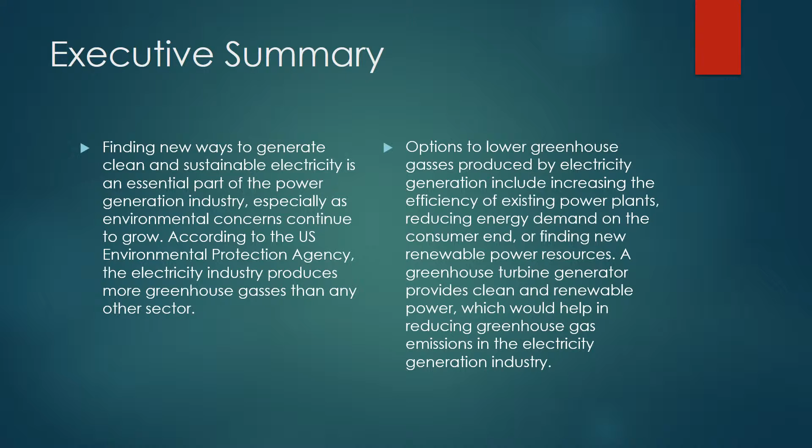A greenhouse turbine generator provides clean and renewable power, which would help in reducing greenhouse gas emissions in the electricity generation industry. A greenhouse turbine generator uses the sun's energy to heat air within a collector, which will force that air to rise up a tower and spin a turbine to produce electricity. There have been several prototype test generators built that have proven the concept, but the efficiency and cost of these generators has been a hurdle for using in industry.

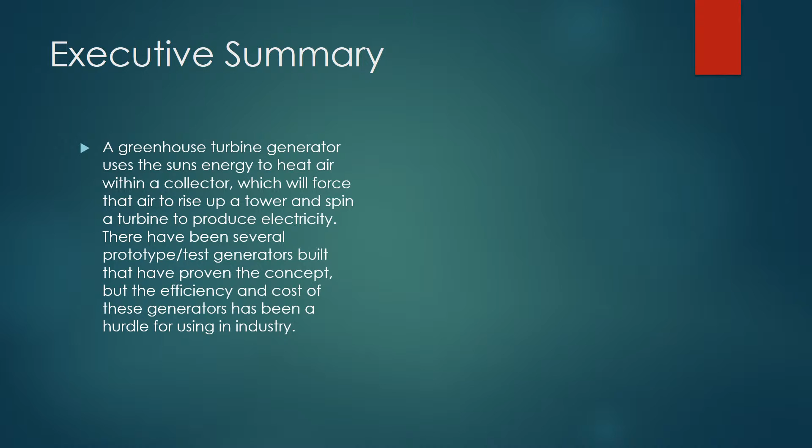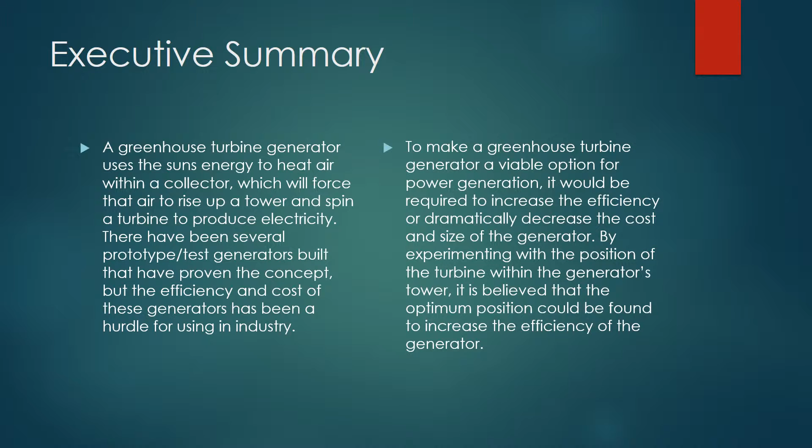To make a greenhouse turbine generator a viable option for power generation, it would be required to increase the efficiency or dramatically decrease the cost and size of the generator. By experimenting with the position of the turbine within the generator's tower, it is believed that the optimum position could be found to increase the efficiency of the generator.

Team GTG proposes to build a small-scale greenhouse turbine generator using available materials such as PVC, polyethylene sheeting, and a DC motor as the turbine generator. The turbine will be repositioned and tested along different points within the tower. Power output will be calculated at each of these points to determine the most efficient and beneficial location for the turbine within the tower.

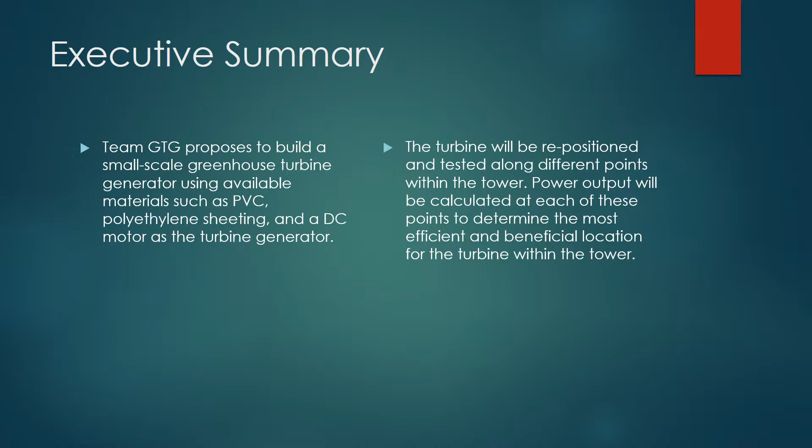The greenhouse turbine generator will be built on a budget of approximately $100 and will be implemented in two phases. The first phase will be building the greenhouse turbine generator in a time frame of approximately 4 to 6 weeks. The second phase is the testing phase, which will take approximately 2 to 4 weeks depending on weather conditions.

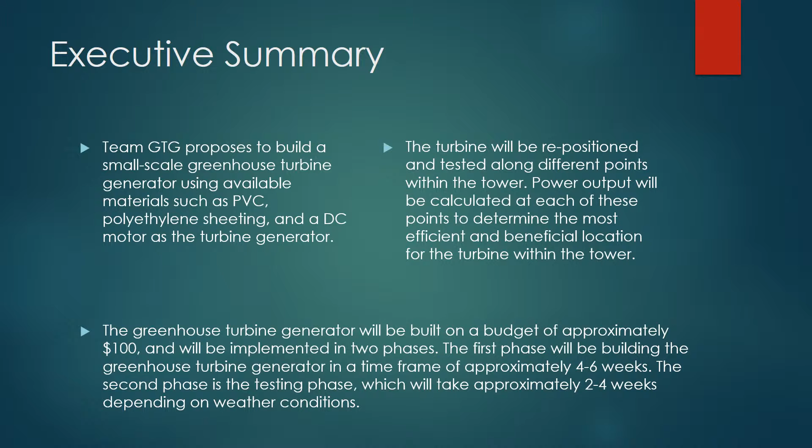Determining the optimum location of the turbine within the tower will provide a design spec that will increase the efficiency of a greenhouse turbine generator. By increasing the efficiency of the generator, it will bring this technology one step closer to becoming a viable option on a mass scale.

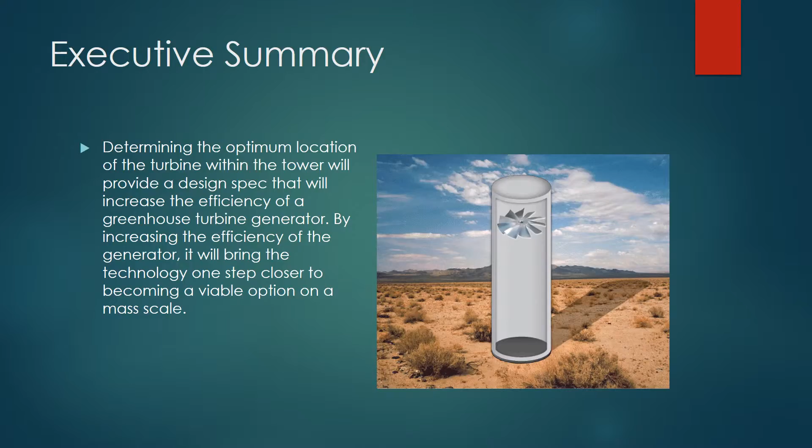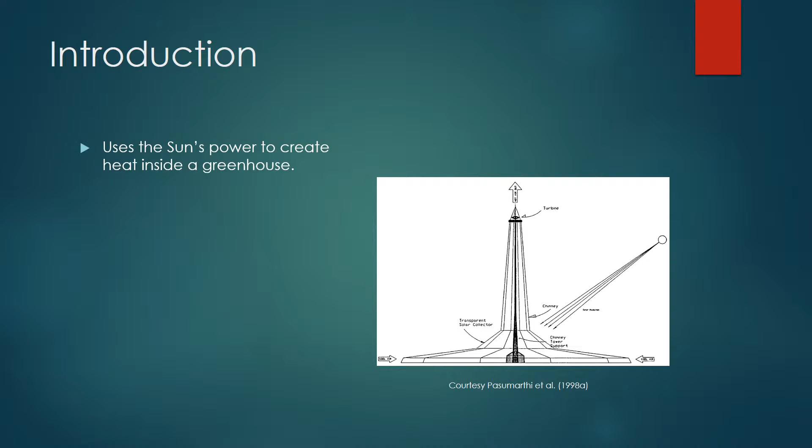A greenhouse turbine generator uses the power of the sun to heat the inside of the greenhouse. This greenhouse is known as the collector area. The air inside the collector is then heated up and it naturally rises to the top of a tower in the center of the collector due to the buoyancy effect. A turbine placed inside the tower will then be used to power a generator.

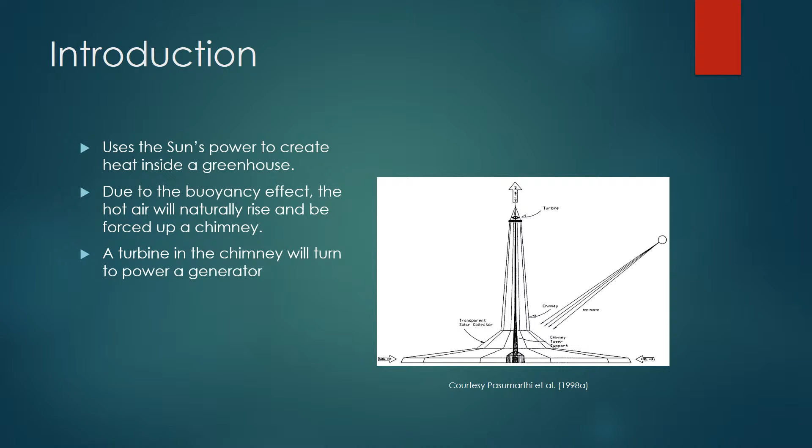The problem that our group and previous attempts have faced is how to increase the efficiency in order to make it cost effective to build. As it stands, previous designs only had efficiency in the 1 to 2% range. At that level, it requires a very large structure in order to create enough electricity to be viable.

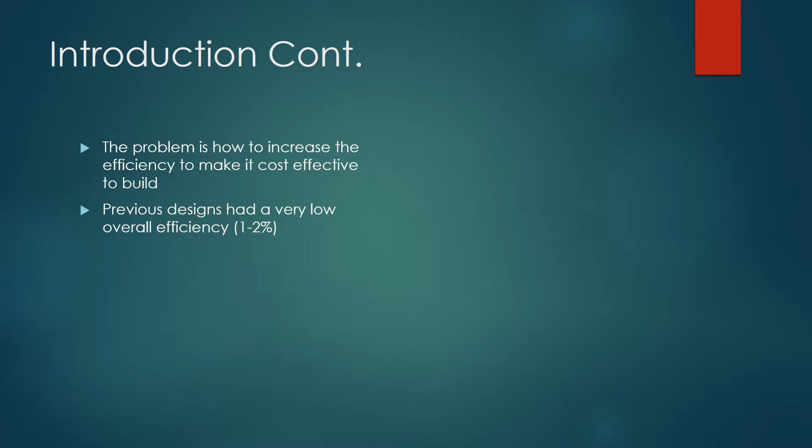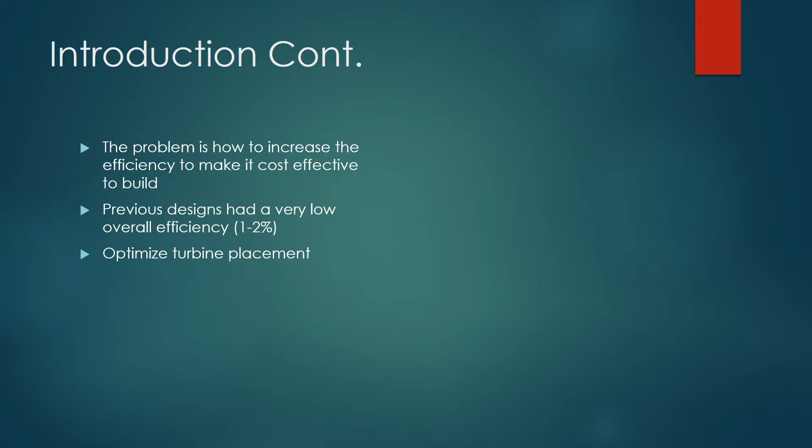We'll work on trying to optimize the placement of the turbine in order to see the maximum air velocity to create the maximum amount of electricity. We'll also try to increase the temperature inside of the collector, as the change in temperature from the outside area is what also will increase the air velocity into the tower.

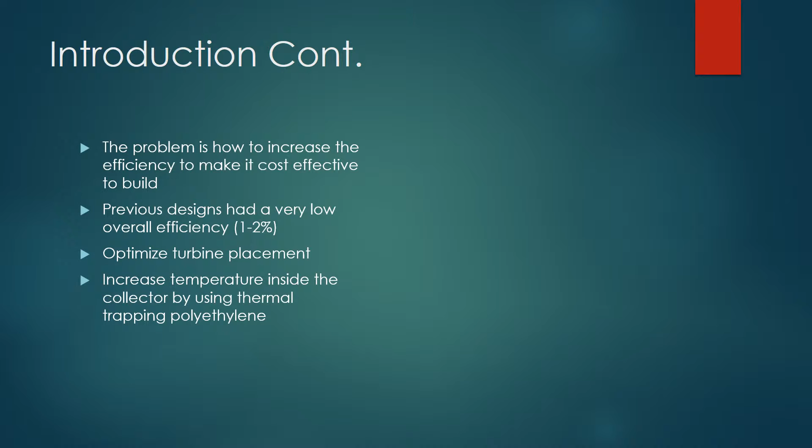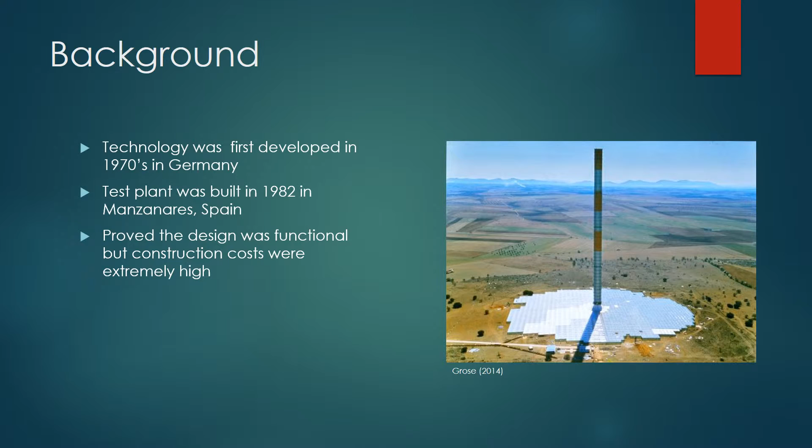The overall design for a greenhouse turbine generator itself isn't necessarily new. It's been around since the 70s, and then in the 80s they built a test plant in Spain. The problem they faced was the overall efficiency didn't make it cost effective. As you can see in the picture here, that tower is several hundred meters tall and very expensive to build. So without an increase in overall efficiency, to allow for either a smaller tower or for higher production, most attempts have been abandoned in creating a facility like this.

We think that by using modern materials, an efficient design, including a different placement of the turbine in the tower itself, and improved materials in the collector, that we can improve the overall efficiency of the system enough to make it a viable design for electricity production.

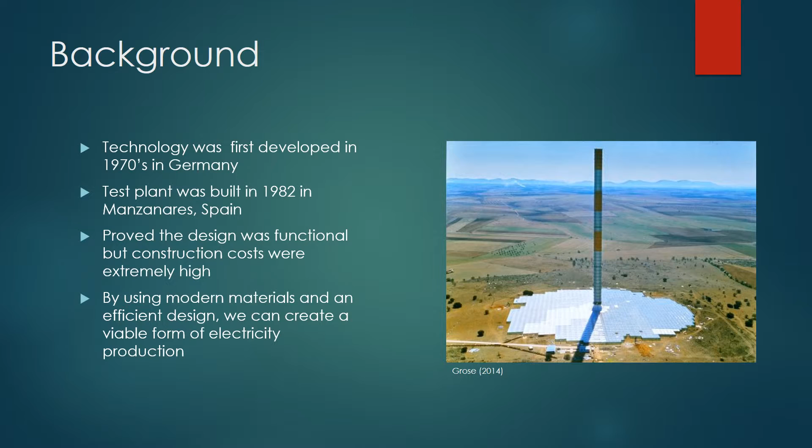Project scope. The overall goal of this project is to design and construct a greenhouse turbine generator. Once constructed, we will then test the position of the turbine within the tower that will achieve the best efficiency. By placing the turbine at different heights within the tower, we can see how different air velocities can maximize our efficiency. Through calculations, we have found that the efficiency increases with the height of the tower.

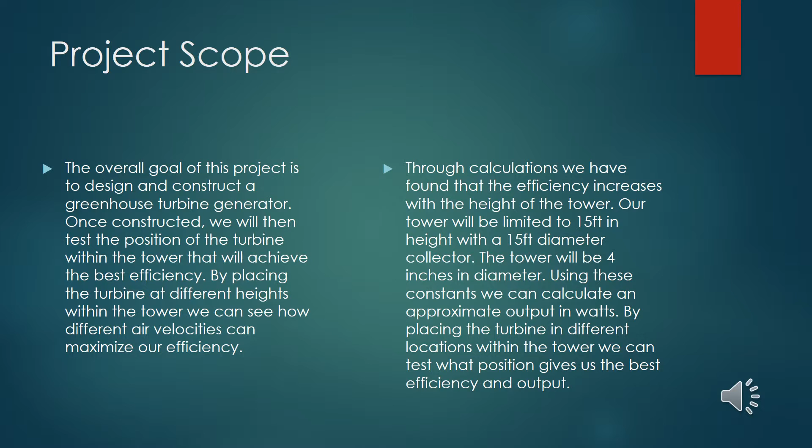Our tower will be limited to 15 feet in height with a 15-foot diameter collector. The tower will be 4 inches in diameter. Using these constants, we can calculate an approximate output in watts. By placing the turbine in different locations within the tower, we can test what position gives us the best efficiency and output.

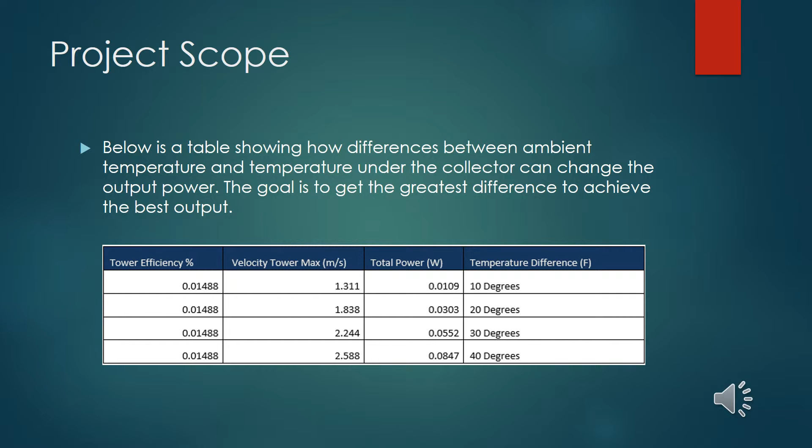The scope of this project includes developing the design and construction plans, acquiring all materials for the construction of the greenhouse turbine generator, installation of turbine inside the tower, installation of the greenhouse collector where heat will be collected and stored, the design and development of the turbine powered generator, construction of the greenhouse approximately 15 feet in diameter, the construction of the tower approximately 15 feet in height and 4 inches in diameter.

The greenhouse turbine generator will consist of 3 parts: the base, the tower, and the turbine generator. We will construct the greenhouse turbine generator and determine the best turbine position for maximum efficiency. The electricity created will be DC power. The scope of this project does not include the commercial sale of any power. This is strictly for research and testing. The building of turbine blades, we will be using pre-manufactured blades. The building of a motor generator, and the use of a power supply to convert from DC to AC voltage.

Our group's design addresses several of the EC 2000 Criterion 4 considerations. First one addresses the environmental. This is a clean alternative for large-scale electricity production. It doesn't have as great of impact on the environment in the long term. There's impact in the initial construction, but then the facility essentially operates on air and the heat generated by the sun.

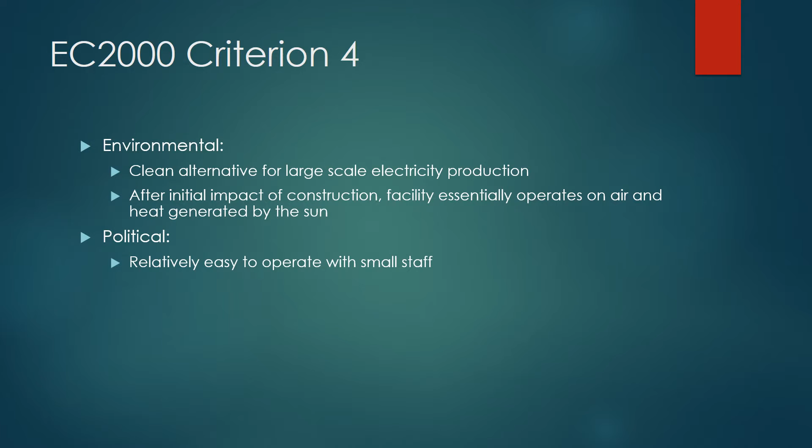Another consideration addressed is political. This facility would be relatively easy to operate with a small staff. This would be beneficial in developing countries that don't have the luxury of a large trained workforce available. So then it could improve the infrastructure by providing electricity to areas that may not have that currently.

Another consideration is the safety. This facility wouldn't use any combustible fossil fuels, so there's less risk of explosion and exposure to toxic fumes. Additionally, there are very few moving parts in this system other than the turbine attached to the generator. There isn't as much danger in the operation of this facility.

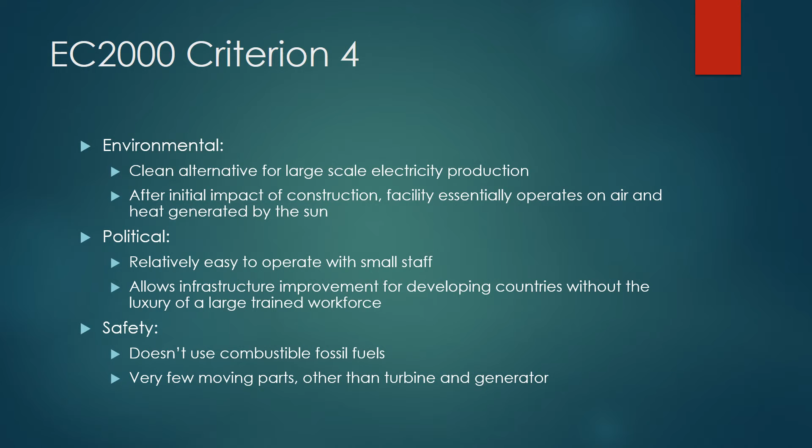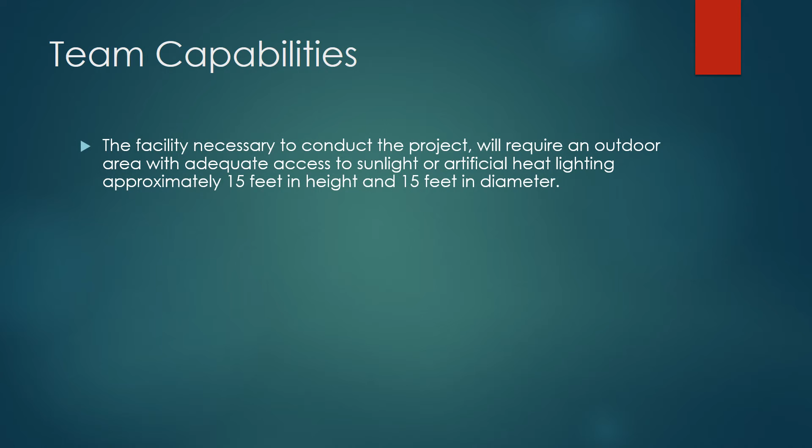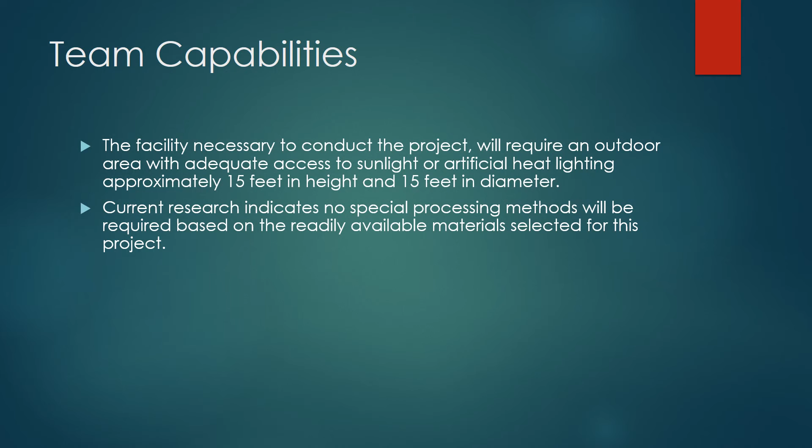Team capabilities. The facility necessary to conduct the project will require an outdoor area with adequate access to sunlight or artificial heat lighting, approximately 15 feet in height and 15 feet in diameter. Current research indicates no special processing methods will be required based on the readily available materials selected for this project. The production will be concentrated in three main areas: the thermal collection area, the central customizable height pillar, and the turbine generator position in the pillar.

The team has been divided into 4 groups, each assigned a different design aspect for the project. Special considerations were taken with group formation to account for special interests and experience.

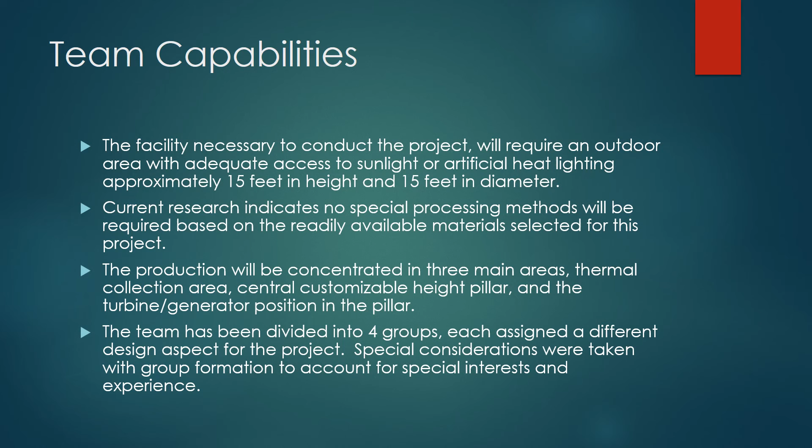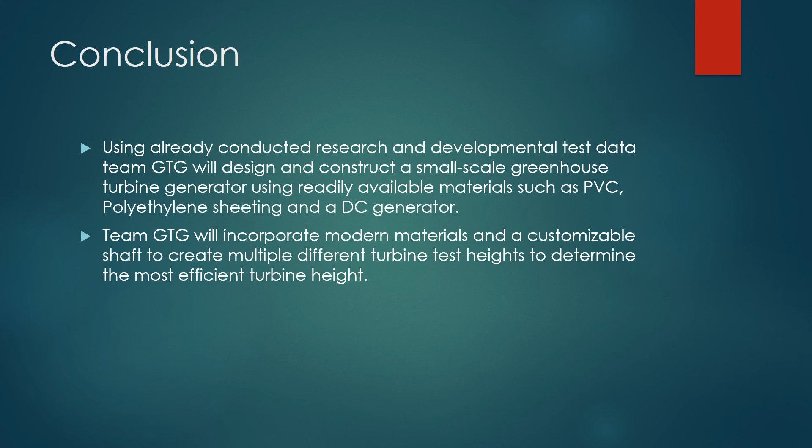In conclusion, using already conducted research and developmental test data, Team GTG will design and construct a small-scale greenhouse turbine generator using readily available materials such as PVC, polyethylene sheeting, and a DC generator. Team GTG will incorporate modern material and a customizable shaft to create multiple different turbine test heights to determine the most efficient turbine height. The construction of the small-scale model will demonstrate this design and confirm that large-scale models will be a viable energy source.